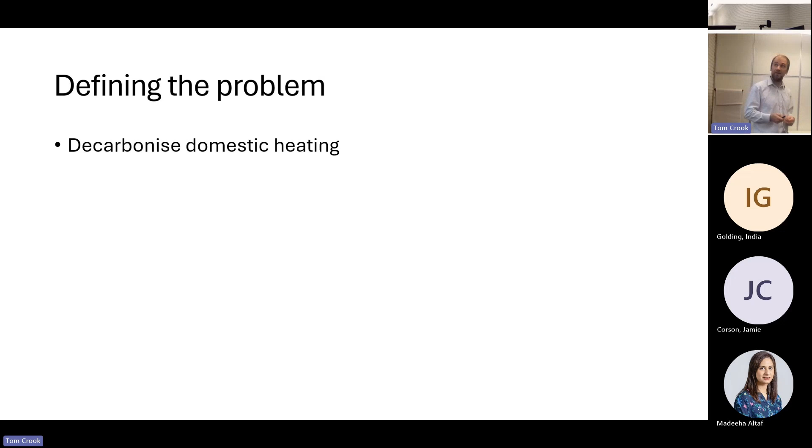So defining the problem. So we want to decarbonise domestic heating. We want to reduce heat demand. That's a big thing to do as well. But as well as that, we want to move away from gas boilers and burning oil. So that's the context. And there's a few different ways being thrown around about how we can do this. We could keep burning something, but that something would be something else, hydrogen or biogas, like that.

We could have heat pumps that use electricity to bring heat from outside the building to the building. We have other types of electric heating, maybe we would have storage heaters or some other sort of direct electric heating. Or we have district heating, which would be a way to use a range of different sources to bring heat to the building through networks of pipes under the ground.

And at the time that I was working, there were lots of different people throwing out suggestions of how we should go about this, with all relatively respected organisations throwing out completely different suggestions of what future heating could be like. So there'd be mainly heat pumps, there'd be mainly district heating, or it could be neither of those, all sorts of ideas floating around.

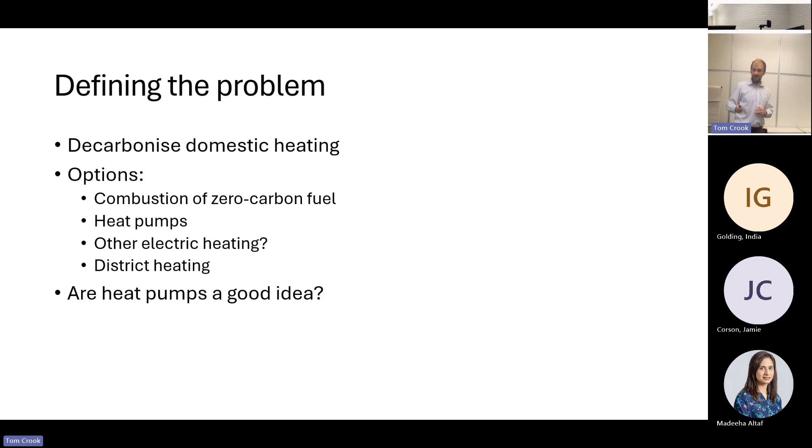So maybe the question that I should be looking at is, are heat pumps a good idea? Because people were saying they're not a good idea at the time, saying it would create tremendous peaks in electricity demand. We just can't deal with that. So they're a bad idea. So that could be one question to think about. Or another question would be, okay, we've already decided that heat pumps are a good idea. So what are we going to do about them? We know that we're going to use more electricity. So how are we going to prepare the electricity system?

So if it's the first question, then maybe we need to make a comparison with the other options that are available, try and figure out, kind of assess all of them and the pros and cons of all of them, and then say something about heat pumps.

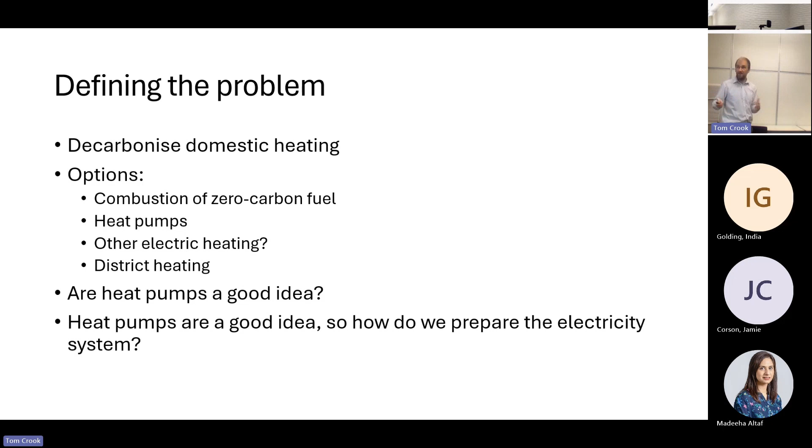In the latter case, we already decided that heat pumps are the way forward, so we don't need to analyse these other options. But in this case, we're talking about planning ahead, sort of 5, 10, 20 years ahead. So we need to not just look at the scenario of what's going to happen, let's say in 2050, but we also need to think about lots of intermediate points, how this is going to evolve over time, so we can gradually adapt the electricity system to cope. So that's going to affect what we're going to do in the project.

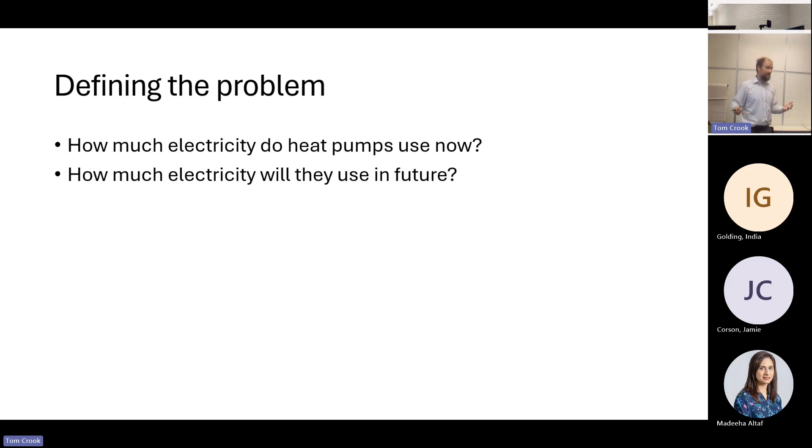And you think about how much electricity the heat pumps are using at the moment. So current installed heat pumps, we could have a look at them. But then maybe it'll be different in the future. So should we be thinking about things as they are now, or should we be thinking about things as they are in the future? They might be different in a range of ways. So if we're going to go for heat pumps, there'll be a lot more heat pumps, but maybe they'll start working a bit better. Maybe the installers will start to do a better job. Maybe the manufacturers will improve their designs of heat pumps.

Maybe the way people use it changes. Maybe to begin with people use it just as they had their boiler before, and they just carry on with what they did before. But as they get more familiar, they start doing different things. We're expecting changes in the climate, and we hope that there are going to be some changes in the building fabric as well. And actually, the starting point of the whole project was really this question here: do people use heat pumps differently to other heating systems?

And this came from Maria Len, who was on the advisory board, and she worked for EDF, and they have a lot of electric heating in France, much more than here. And she was very surprised by seeing the large peaks in demand that we see with gas heating in the morning and evening, because they don't seem to see that in their analysis of French electricity data. So is it something to do with France, or to do with electric heating that seems to give us different patterns of use, or is it something to do with the way that they're analysing the data?

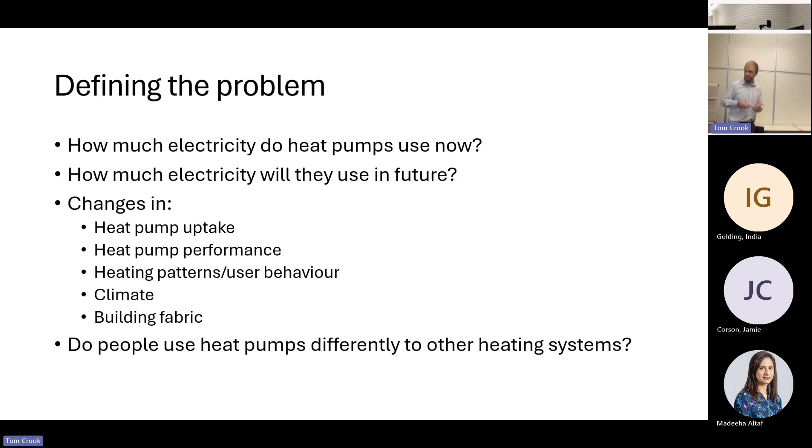So we've got all these different sort of questions floating around, and we need to sort of pin that down a bit more before we can then figure out how we're going to address this. The other thing, and Meg's probably going to be quite bored in the next minute or two, because I'm always going on about this.

But what is the scale we're interested in? Individual buildings, or maybe the local area? Because in that case, we're thinking about maybe the local electricity system and the distribution network, which needs changes made to it, new transformers, new cables into the street. Are we thinking about this from a national point of view? So can we generate some electricity nationally, or maybe regionally? So it might interface with the electricity system at different points.

And we went as far as national there, but is this applicable beyond the UK, or are we only focusing on what happens in the UK? You know, when we publish papers, it would be nice to have something international to say rather than just being nationally focused. And what timescale are we interested in? Are we talking about minute-by-minute electricity demand, are we talking about annual, or something in between?

And those two questions are kind of related to each other, partly because if you were looking at national electricity demand at a minute-by-minute scale from all different buildings all at once, that's going to be an unmanageable amount of data, but also because what actually matters would be different at different spatial scales. If you're talking about an individual building, you might actually need to know about it minute by minute because you've got these very short spikes in demand from things happening in the building, whereas if you're looking at a national level, that's no longer what you need.

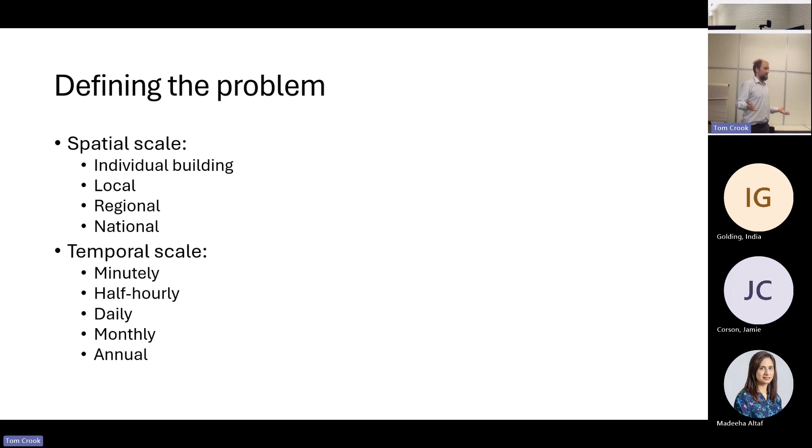And I guess monthly and annual questions, this is always a bit of a change of mindset, that historically, when we're thinking about energy demands, we're thinking about annual, because if you're burning gas, for example, then you just need to know, oh, we're burning 10,000 kilowatt hours a year of gas. Okay, that's fine, it doesn't matter when it happens in the year, we just need that much gas. We're done. But if you're talking about electricity, renewable electricity, then the timing suddenly becomes extremely important. So maybe annual isn't particularly useful.

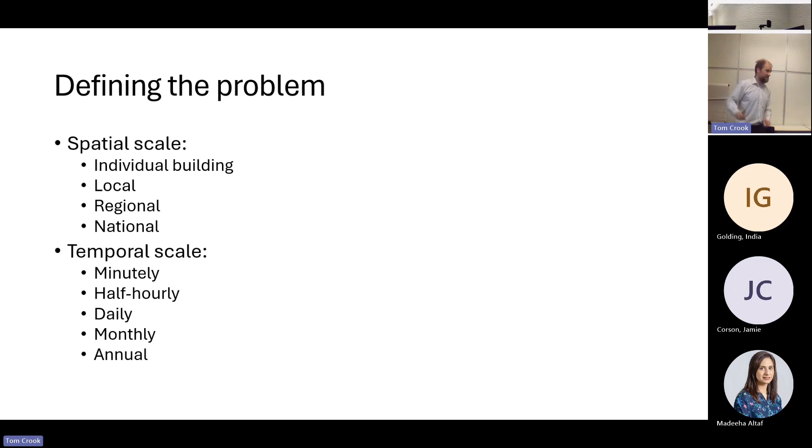So thinking about all those sort of ways of defining the problem, I decided to look at national electricity demand. I think that looking at a local level is also really worthwhile. I chose to focus on national partly because the cost of generation of electricity is probably the biggest cost, rather than upgrading the network. So generation matters at the national level.

I chose half hourly. That's partly driven by the data that I had available to me, also because the electricity market works on a half hourly level. And I wanted to look at, okay, what's happening now, but how we expect that to change in the future, how we take that into account. This isn't word for word what I had in the thesis, so I need to check exactly what it said there. So how are we going to approach this?

So one method would be thermal simulation. And that would give us this high temporal resolution, half hourly, that I said is important. So we could do that. We would need to know quite a bit about the building fabric of buildings. And we could definitely do that for individual buildings. If we're looking at the national level, we'd have some archetypes to represent different categories of buildings, so that might be fine. We would need to know what people are doing at different times in different homes. We'd need that information.

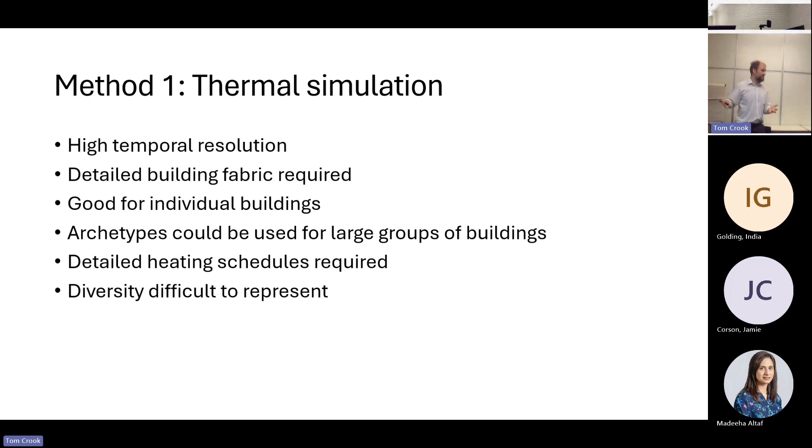But the key point here is that diversity would be hard to represent. This is something that Robert Sansom pointed out in his thesis, and when I read that, I thought, oh yeah, that's exactly right. He was addressing a somewhat similar question, and he started off actually doing some thermal simulation, but then realised once he'd done some, this is the challenge.

So diversity is the fact that not everyone does things at the same time. This is a good thing because it means that, for example, electricity networks don't need to be sized big enough for everyone to do the same thing at the same time. Similarly, water pipes or all sorts of things, road networks. So peaks of demand don't perfectly coincide.

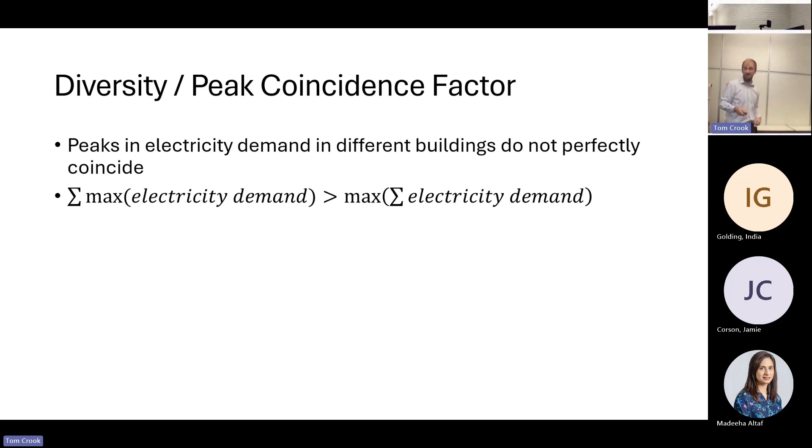So if you get the maximum of everyone's electricity demand and then you add it all up, say that your max demand is 10 kilowatts and mine is 8 kilowatts, and you add that together, we get 18 kilowatts. In reality, if you combine the electricity demand from George and from me, the max is not going to be 18 kilowatts, so we're not going to have that happening at the same time. And the ratio of those two is the peak coincidence factor.

So that's a number less than 1 because we don't have our peaks in demand at the same time. We do things at different times at different houses. So peak's going to be less. How much less? What is this peak coincidence factor? It depends on lots of things. We can get values of this for existing electricity demand with things like kettles and cookers and so on. But the numbers that we have for that don't necessarily apply.

So if you've got kettles, that's pretty powerful. That's used for a very short time. So the peak coincidence factor is pretty low because the chances of you putting on your kettle at exactly the same moment as me are not that great. If you're talking something like heating that is used for quite a few hours, the peak coincidence factor is going to be a bit higher. How much higher?

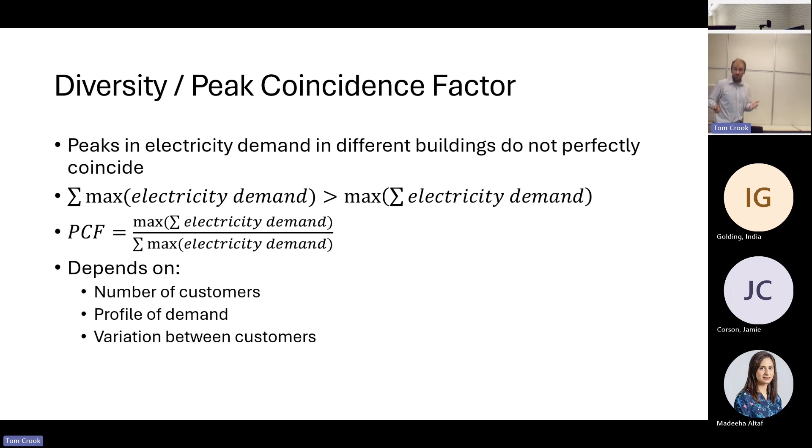So this is the problem: if we're interested in national electricity demand or even electricity demand from a group of buildings, it's pretty tricky unless you can see something like this peak diversity or peak coincidence factor. And it depends on these things we don't really know, or didn't know at that point in time. To do that, we would need accurate knowledge of these schedules in various different homes, which I didn't have at the time. But maybe you could do this, and I think that would be an interesting thing to do.

Maybe somebody can try. Maybe you can get a data set of lots of monitored temperature data from lots of homes and figure out what's the range of heating patterns, and on the basis of that, what is the peak coincidence factor, and how does it then affect the demand for heating and electricity if they're all from heat pumps. Maybe somebody here could do that.

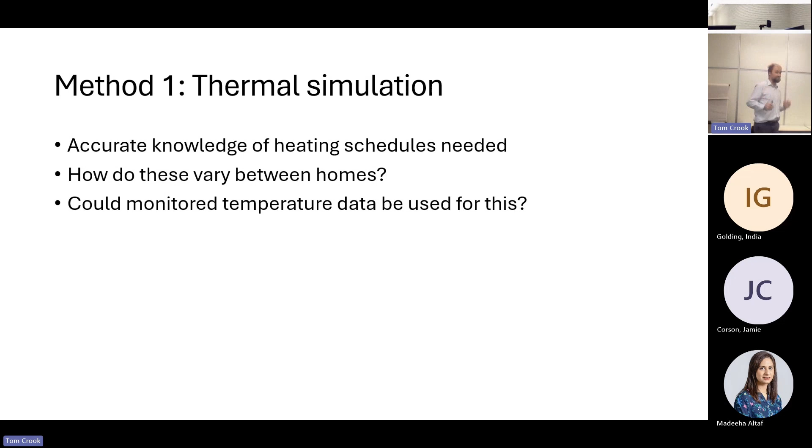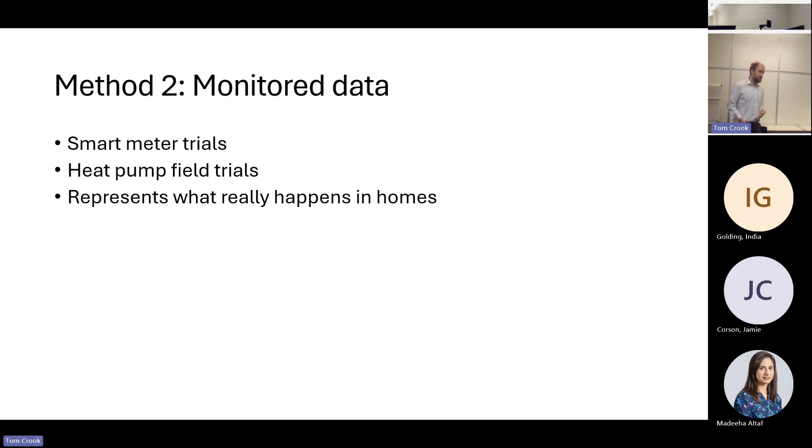So I didn't do that, and I started thinking more about monitored data, specifically from this trial of smart meters. Now there's things like SERL, where you get access to smart meter data that didn't exist at the time, and also heat pump field trial data. And that shows us what's really happening in homes, which is good. So we're not just assuming that people do things at particular times. And it allows us to represent diversity in real homes.

How does that fit together when you add them together? It's good for what happens right now, but it's kind of tricky for what happens in the future, because we don't have the flexibility to change lots of things and see: if we're going to add insulation to these walls here, how is that going to change the demand? You could answer that question with thermal simulation, but it's going to be a bit more difficult here.

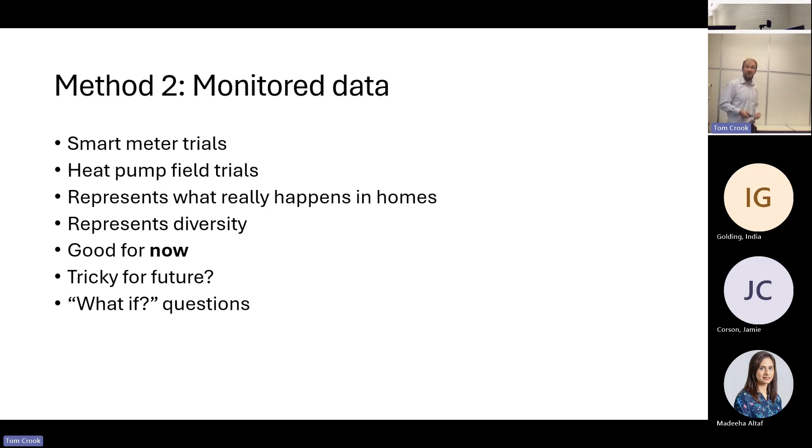But the main problem was that we had a lot of data from homes with gas boilers that were, as far as we can tell, representative of the housing stock. But we sort of thought, well, maybe people use boilers differently to heat pumps. And then we've got a lot of data from homes with heat pumps, but we know for sure that these homes are not representative of the housing stock.

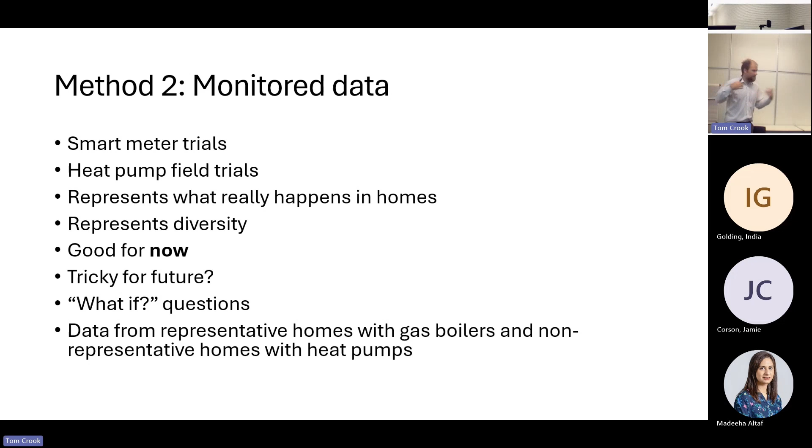These heat pump homes are either large rural homes with relatively well-off occupants, or they're social housing. About 1/3 private, large rural homes, 2/3 social housing. So that's not really representative of the housing stock. And this was the main puzzle: how do we piece this together? How do we come up with some method that represents how people actually use heat pumps, but also takes account of the fact that this isn't the right housing stock?

There was lots of data cleaning to do. We've got a relatively large data set. I hadn't done something like this before. There were 4 different electricity suppliers involved in the smart meter trial, and I have the feeling that there was some condition that they had to make the data available afterwards, but nobody put any effort into making it usable because they were just forced to do it.

That's the feeling that I get, because it was all just dumped into one file of 4 different suppliers in a random order. There were a few data points from one year, and a few data points over here from some other year. Who knows what's going on? A lot of work for me to try and make sense of that and identify the problems and sort them out. As far as I'm aware, nobody else has done that.

Other people that have looked at EDRP data have just taken the electricity data from one supplier, or a separate data set from just one electricity supplier, and maybe they were able to deal with that. As far as I'm aware, other people have got this data and thought, oh, I can't be bothered with that. I'm not doing it. Maybe they're sensible people.

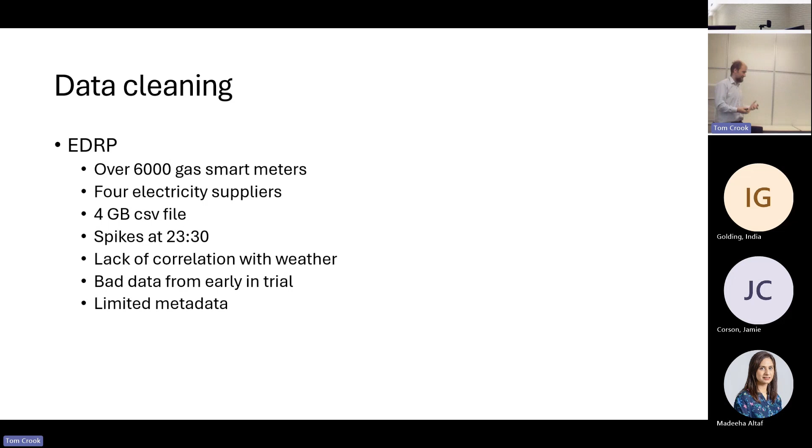So there's lots and lots of work going round and round. You think you solved it, and then you find something else going on. Is it real? Is it not? Am I biasing the data set if I take this out? What does this actually mean? The heat pump data is a bit smaller, but measured at higher resolution. We've got a bit more information about the buildings.

But there were also problems with that data set. UCL in particular had a hard time with that, because they were responsible for writing the report on that data, and they showed up for the data after it had all been collected and were told, tell us what it all means. But they had no involvement in collecting the data. So there were problems, but they couldn't go to the homes to identify what the problems were.

If you ever mention this to anyone in the industry, they'll have a great big rant about how it was a load of rubbish and people at UCL don't know what they're doing, and they didn't know the first thing about anything. Yeah, if there's an awkward silence or something, you can just say that, and then they'll just keep talking at you for ages.

Yeah, so I could try and identify problems in the data. You hope that once you've done all that, you've identified the problems and removed the homes with those issues. Maybe you can't know for sure that you achieved that, but that's what you're trying to do. Things like the temperature sensors being strapped onto the outside of the pipe rather than inserted, so they're actually in the flow of the water. The heat meters being calibrated for pure water, when it's actually a mixture of antifreeze and water.

Something going a bit weird with the heat meters, the flow was gradually declining over time, suggesting something not quite right there. Measuring heat in general is a bit more tricky than measuring electricity. You've got to measure flow rate and two temperatures correctly. And if any of those three things are wrong, your reading's wrong. Whereas electricity is easier to measure.

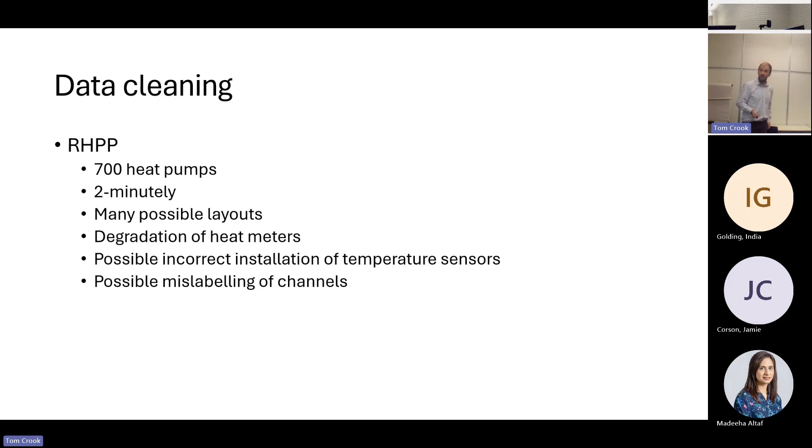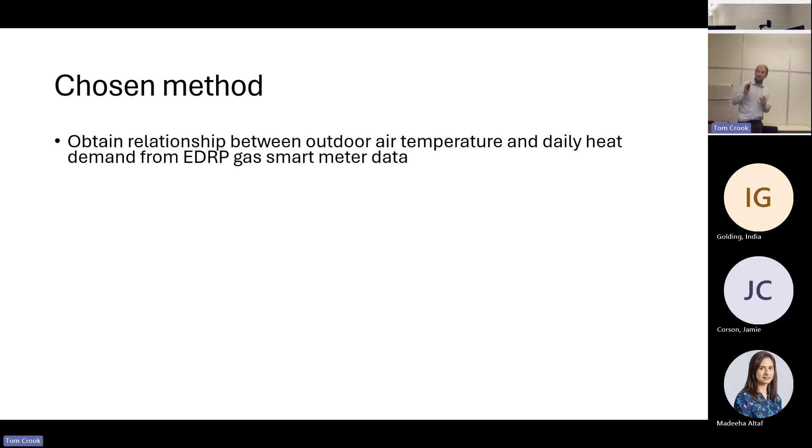So I was going with monitored data rather than thermal simulation, for the reason I described. I started out by looking at the relationship of outdoor temperature and daily heat demand from smart meter data. And then I looked at the patterns of heating in the gas data and in the heat pump data to understand how we're using gas boilers and heat pumps. Is that different? It kind of was one of our starting questions.

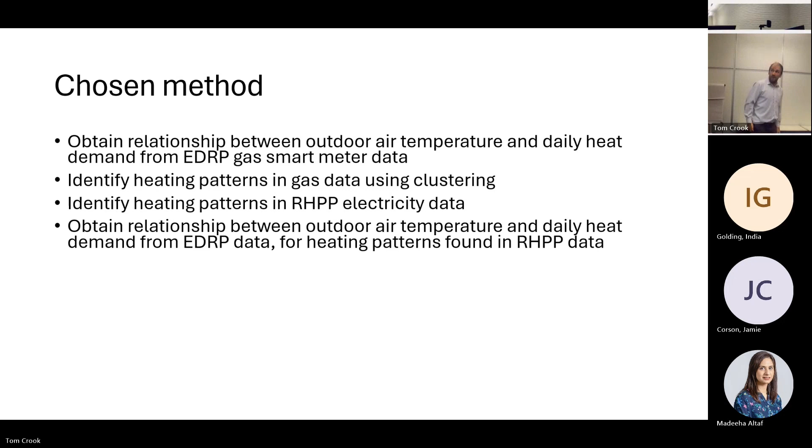And then look at how does that affect this relationship between daily outdoor temperature and daily heat demand. Is it different for people that use heating all day versus people that use it morning and evening? So there's a stage I sort of slightly skipped over after that, which is then to look at how we use the heat pumps and how does that then convert from daily into half-hourly demand. I'll explain that later.

And then, so that gives us heat demand. I want to talk about electricity demand, so we can see how well the heat pump is performing. So again, using the RHPP data. So this was the daily heat data, daily electricity data. I tried to steer away from using the heat data as much as I could, because we knew that was where the biggest issue was, but inevitably you have to use it somewhere to get this relationship between heat output and electricity input.

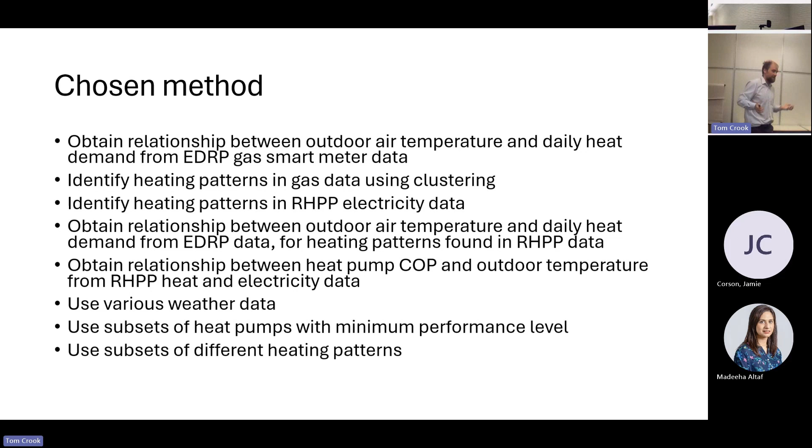Look at different weather data, to look at what might happen in the future. And then hopefully heat pumps will start performing better. So we could look at just a subgroup of the best performing heat pumps from the sample, see how that looks. And indeed, there has been another study of heat pumps since then, and there has been some improvement. And then look at different subgroups with a particular heating pattern to see, if heating patterns do change in the future, how much of a difference is that actually going to make. So it's 4 results chapters.

How are we doing for time? 5 minutes. Right, good. I'll talk about these more quickly and then I'll say a bit more at the end.

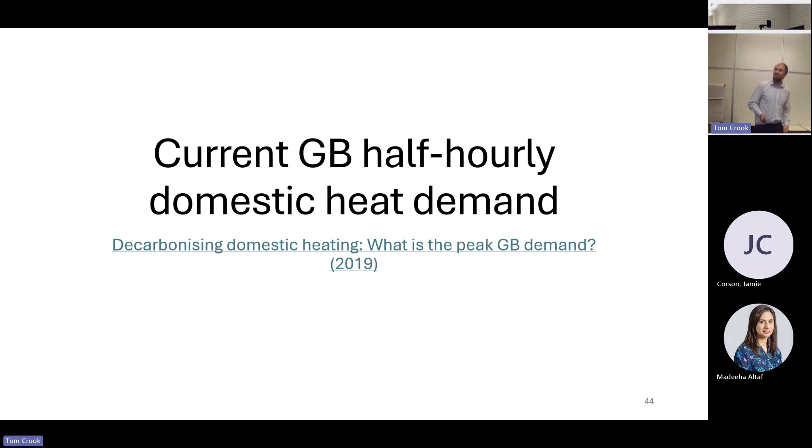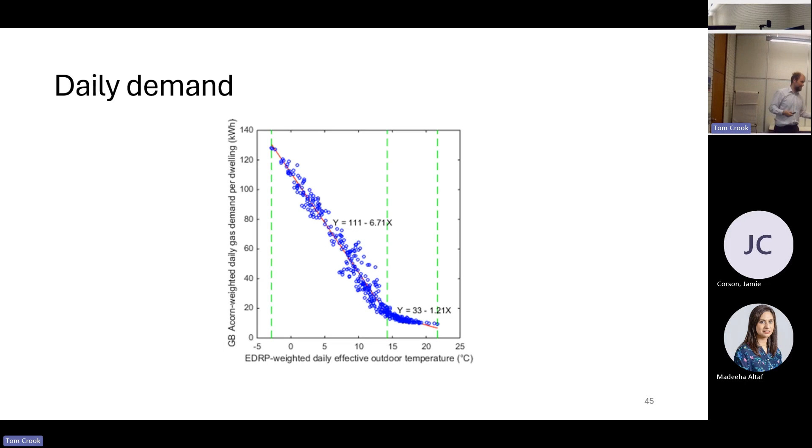So this is the first bit. Look at the current situation. That's what I was talking about, daily heat demand. We've got this broken stick shape. That's what you'd expect because this bit down here is when most people have stopped using their space heating. So it's not as much related to temperature, whereas that bit on the left is when people are using space heating and that's strongly related to outdoor temperature. This is one of the key points, which is that the way that's spread out over the day is different at different outdoor air temperatures.

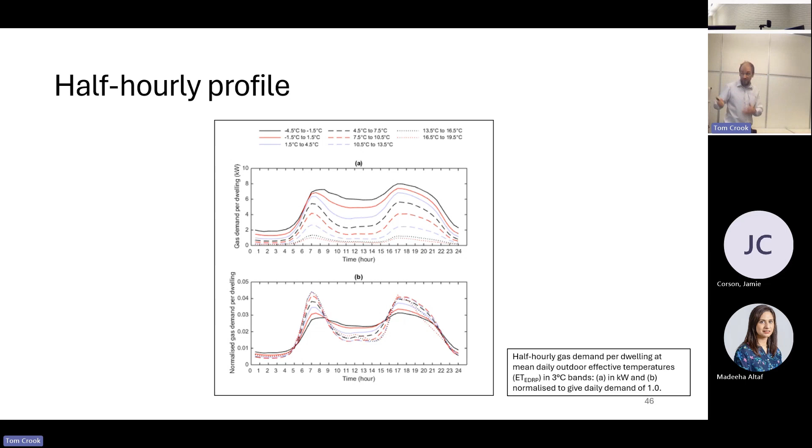So you've got the same area underneath. At the warmer temperatures, you've got quite a big spike in the morning and the evening, and a sort of flat bit in the middle of the day. At the colder temperatures, it's actually more flat in the middle of the day. So that suggests that perhaps when it gets colder, there's more people using their heating through the middle of the day. Whether that's that maybe they've got a set point that it doesn't normally fall down to through the middle of the day, or they're manually fiddling around with a thermostat, who knows? But that's what's happening, and that does fit in with what people have said anecdotally in the past.

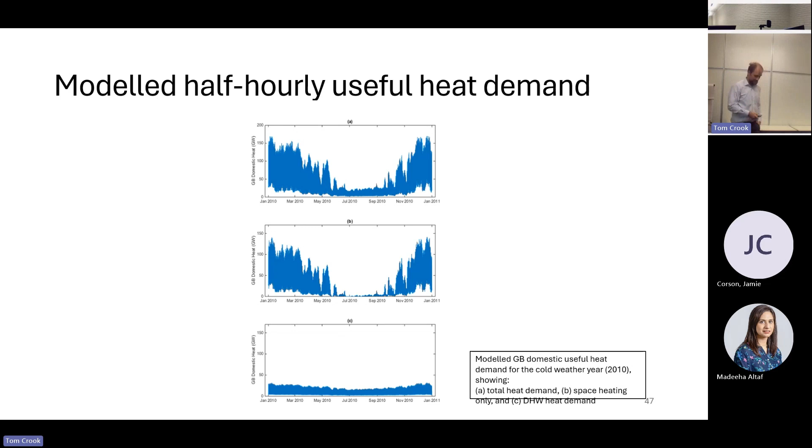So you can use that to then get this half-hourly heat demand. You can split that into space and hot water. Comparing to Robert Sansom's, this is quite interesting. He looked at this before, it's a similar method on a much smaller data set, including only relatively mild weather and not accounting for the way this shape changes. And so a graph based on his work was floating around at the time, and what he found was these tremendous spikes in heat demand and very steep gradients. So the gradient you see goes shooting up very steeply.

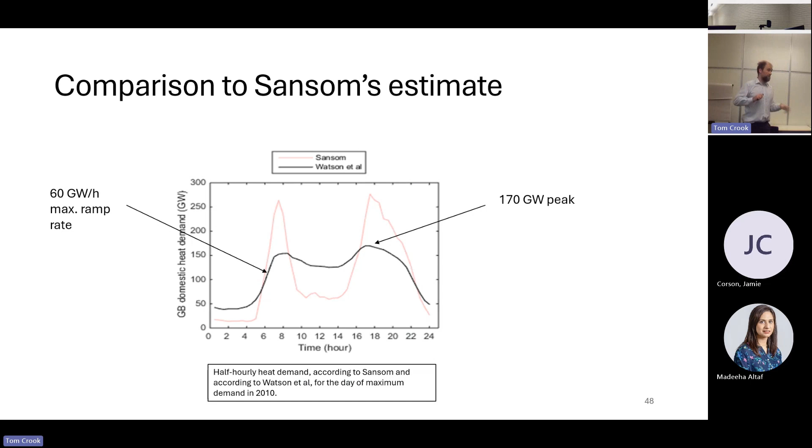People were using that to say heat pumps are silly, because how can we possibly design an electricity system that can cope with these tremendous swings in demand and huge peaks? But I found that actually it was much less severe than that. Okay, there are big peaks of demand. This is a big challenge for sure, but it's not as bad as that. And that seems to be of interest to quite a lot of people. There's been another paper more recently by some other people using a completely different method, and their findings were fairly close to mine, so that was quite nice to see.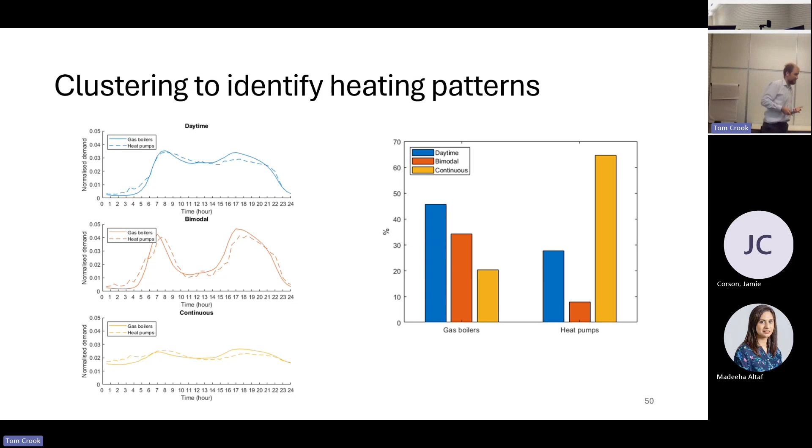Is that going to change over time? Maybe we get more heat pumps and we'll have to run them through the night. Or I'd actually like to be a bit cooler at night, I don't know. Because we've done that, we had the opportunity to look if there's any other factors affecting that. We can then look at the effect of that on the daily heat demand. It's like what I showed you earlier, but just for the subgroups of different particular heating patterns.

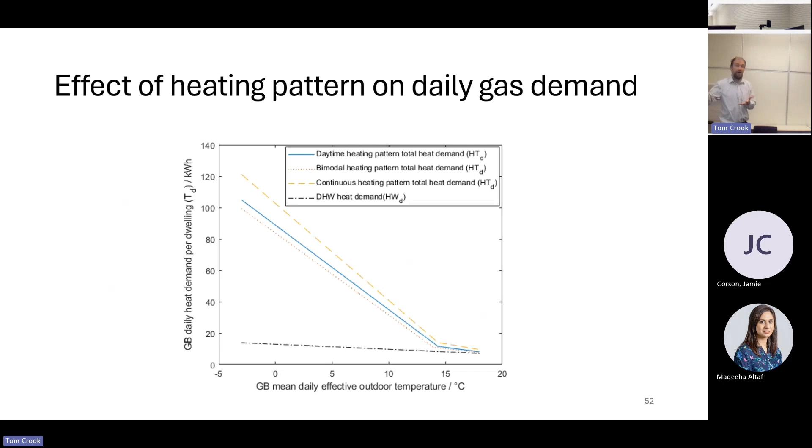So you can see then that if people switch from one set of heating patterns for boilers to another set of heating patterns for heat pumps, you can see how that's going to change their daily heat demand. Over the course of the year, that's going to give about 8% more heat demand when you switch from a boiler, because you're starting to heat more hours per day, which fits in with previous estimates. The same thing for heat pumps, but now it's a slightly different shape because there's a lot more people using it through the night than they were with boilers.

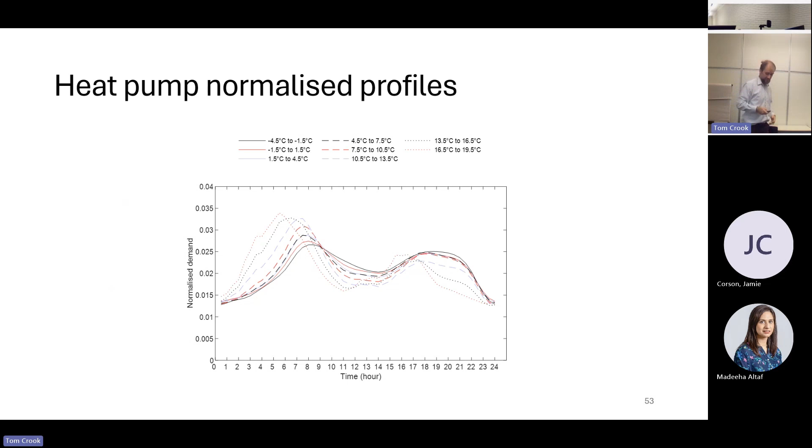And so you can do that same kind of method as I did before with the heat pumps. And you can see the peak demand with the same weather data. That peak demand's a bit lower. With heat pumps, because people use them through the night, there are not such big spikes in the morning and the evening. 157 and 170. But the ramp rate is much less, the gradient is much less, so there's not that sudden everyone turning the heating on in the morning and it's shooting up. So that's been interesting as well. So it's not such a severe challenge for the electricity system to cope with.

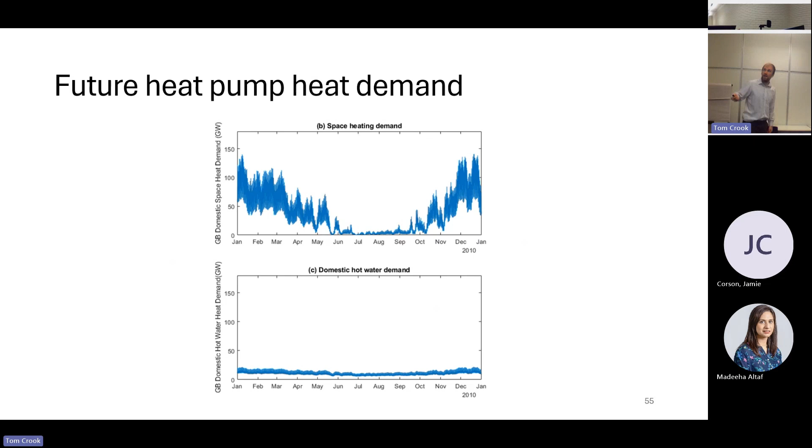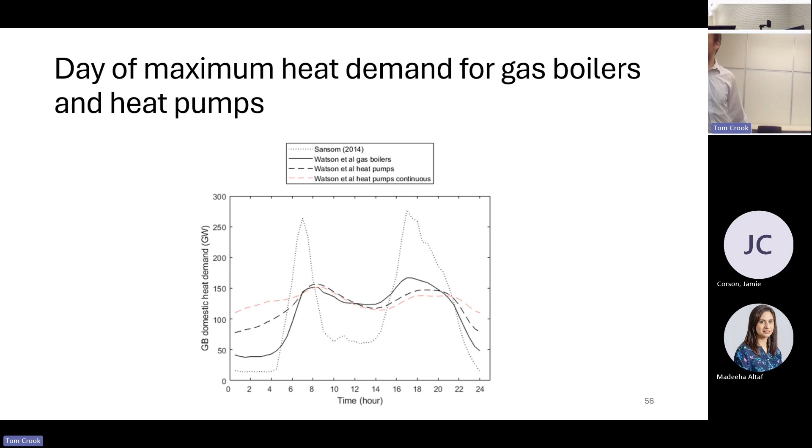And then we look at that for space heating and hot water, looking at the coldest day of the year. So the solid line is the one I showed you before for boilers. And then the dashed black line is for the heat pumps. So you can see that heat pumps are being used differently to boilers. There's a lot more people using it through the night, so there's a lot more demand in the night. But all of them are much less than what was previously suggested.

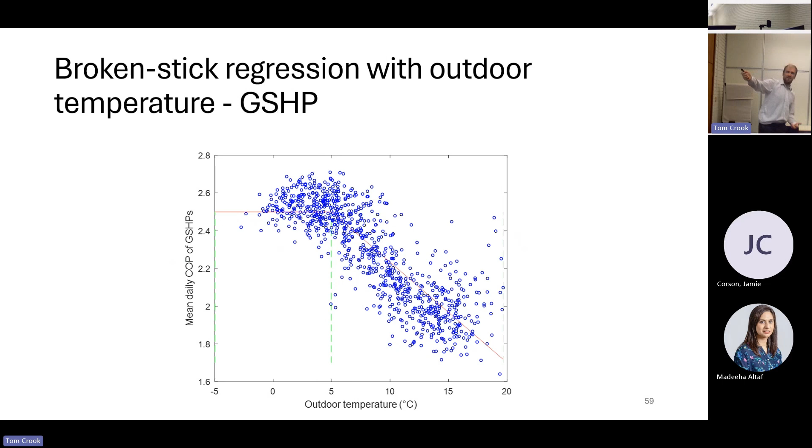There's a lot more scatter for ground source heat pumps. They're not that directly affected by the temperature. Maybe you could say that this is the wrong approach. Just look at that, it looks a bit questionable. And then we take subgroups of the best performing heat pumps for ground source and air source.

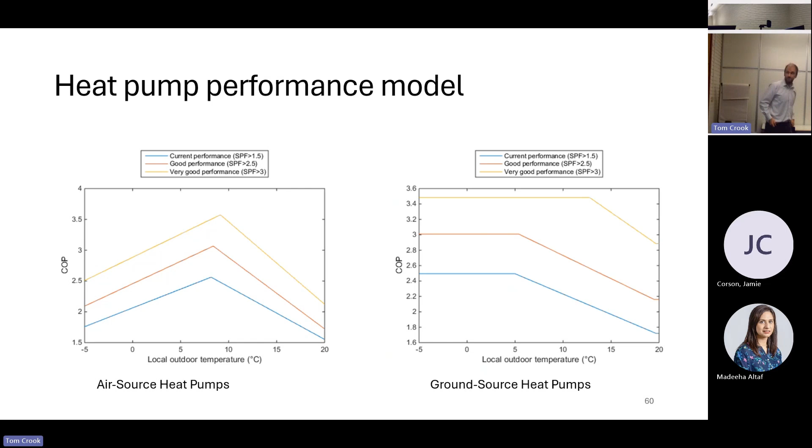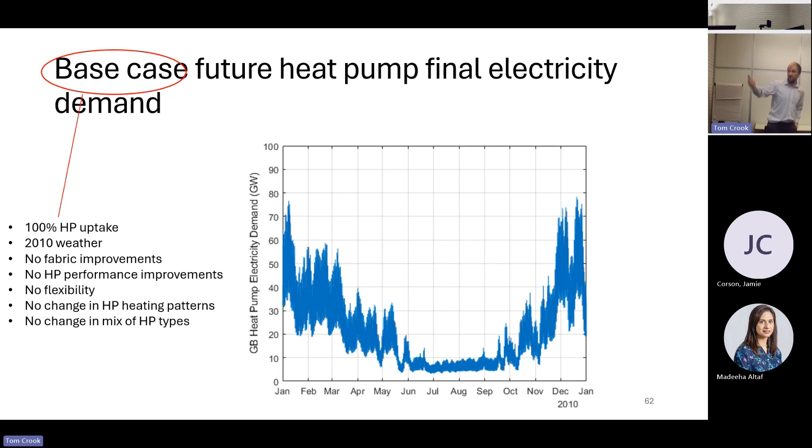So you can put it all together. I call this base case. It's kind of like the worst case, really, assuming that there's no improvement in anything, everything just stays as it is now, and it's a really, really cold year. This is what we get. We get 76 gigawatts of electricity demand if everyone has a heat pump and nothing else has improved whatsoever since the current situation. Current peak electricity demand is about 60 gigawatts, so you're still talking about more than doubling the electricity demand. So that's what it looks like if you add on to existing electricity demand.

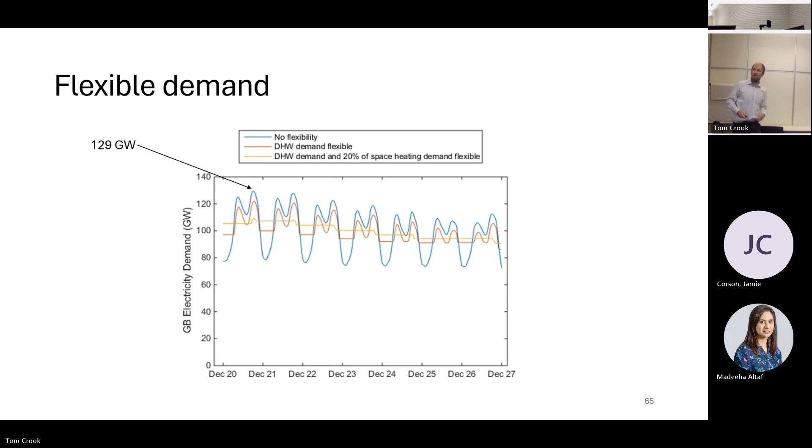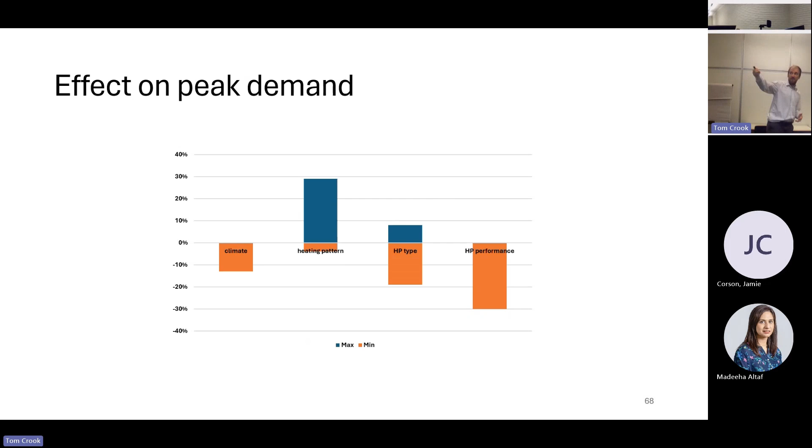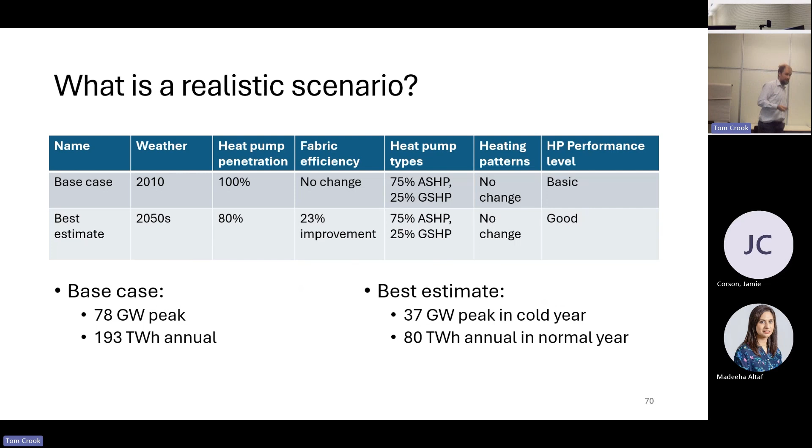But we look at the flexibility, I won't say too much about that. But then we look at what all these different things change: climate change, energy efficiency of buildings, and heat pump performance. What does that look like? You can see there some effects they might have, and then we went for what we thought was the best estimate of some reasonable assumptions. Other people would disagree. They can go to previous graphs to see what they think it would be. To see, okay, what might it be like? And those are the results we found. So okay, it's still a big new electricity demand, but it's not something completely unrealistic.

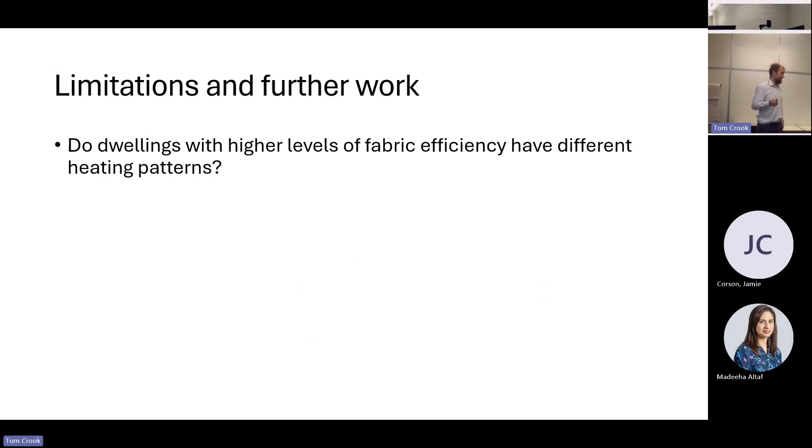So this is what I want to say a bit more about, so trying to get through the results quite quickly. So we don't really know if, usually, when the building changes there's a change in heating patterns. Do they think, oh, this is great, I'll only need to put heating on for 2 hours a day? Or do they think, well, there's no point in turning heating off because it is really efficient anyway, so we've got to keep it on 24 hours a day? I don't know. Has the data cleaning worked? We hope that we've identified problematic data without biasing the data set by removing good data.

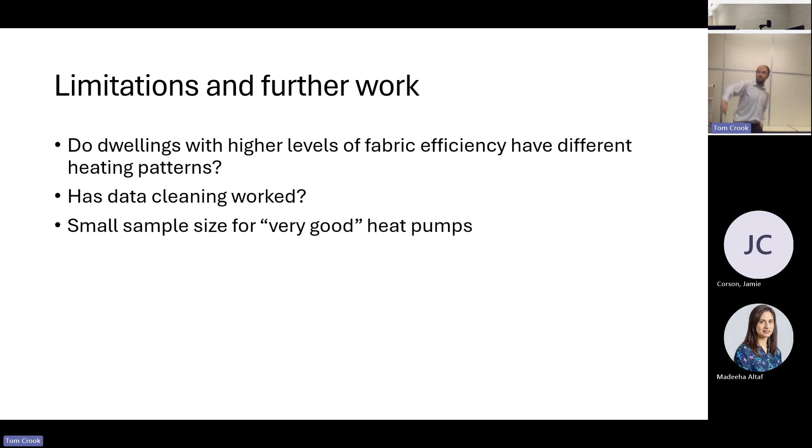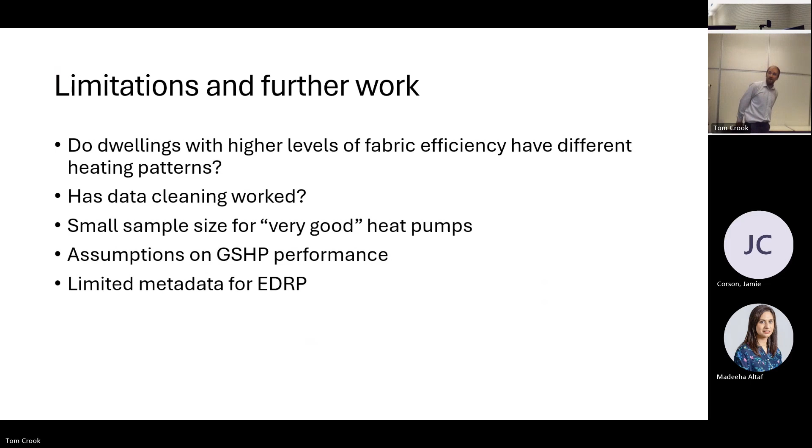Look at the very good heat pumps, particularly the ground source, that's quite a small sample size. Is that realistic or not? You saw there's a lot more scatter in the ground source heat pump performance anyway. Is that the right approach to it? The metadata for the gas data was quite limited.

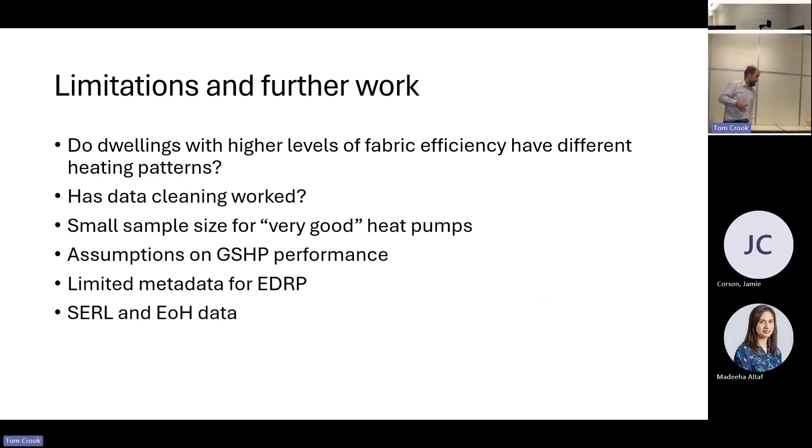There's 2 new data sets which you can use now if you're doing the same project now. You've got smart meter data. Okay, it is within the secure lab thing, which is a bit tricky, but you can do something with that. And the electrification of heat is kind of like a follow-on study of performance. Now, the data is better quality, you might get some interesting findings. And maybe somebody could choose to do seasonal variation, maybe there would be some value in doing that, taking into account the variation to get real homes.

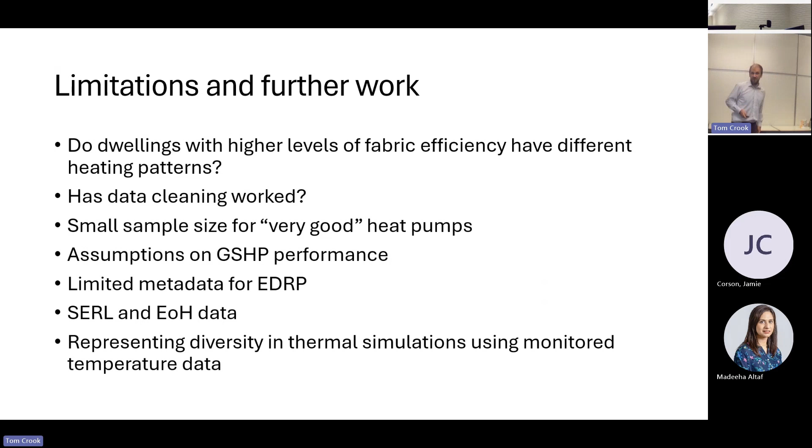The last thing I want to say is that what I presented to you today seemed quite, well, I hope it seemed quite logical. We sat down and we thought, okay, what's the problem here? This is the problem. Here are the ways we're going to tackle it. Right, we're going to pick this one, because this one's the best. But actually, what really happens is much more like this ball of noodles, because everything is connected to everything else. It's all sort of tangled together, and you tried one thing, and you got so far with that, and then you realised it's actually a bad idea, and then you did something else, and then you thought you solved it, and then you realised there's actually problems with data cleaning, and there were some other issues with data. So you have to go back and start again, and then you have to try and write it down for other people to understand.

And what you need to do is don't write that down, because nobody will understand. You need to write it down as if you knew what you were doing from the start. Write it down in really clear and logical steps. And I find it difficult because things tend to be connected. You think, is this part of the method, or is this actually a result? And is this data cleaning, or what is this? That's what really happens, but you have to write it down in a very logical step-by-step way as if you really knew what you were doing. That was the end.

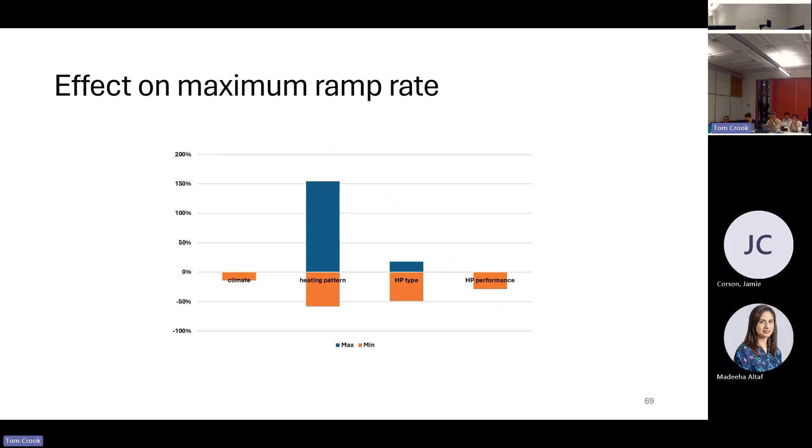It is, I guess, a question of should we be looking at how heat pumps actually perform in real homes right now, or how well could heat pumps perform if they were set up well and running properly. And I think that's what the heat pump industry gets angry about, because they know that heat pumps can perform much better than that. If you're trying to find out how well heat pumps can perform in this home, that's one question. But if you want to say what's actually happening out there in the wild, that's what's happening now. With the new data, there have been improvements in performance, which you can see.

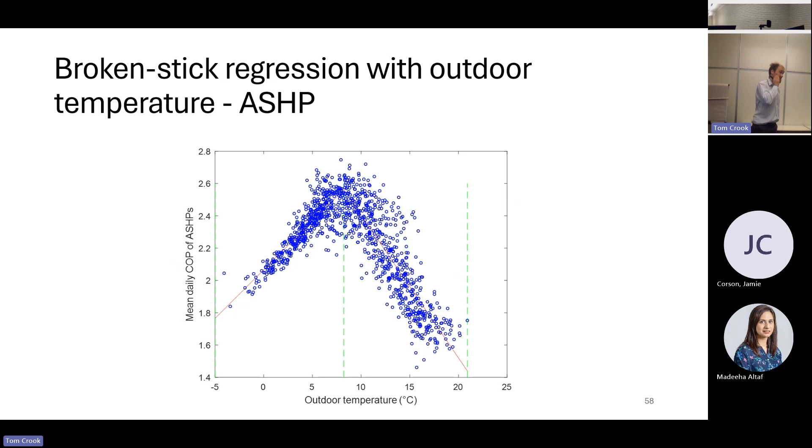And this itself was an improvement on the previous heat pump field trial, which was 2008 to 2010. It's smaller, but was an improvement in this trial. So it did move in the right direction. But the main problem was them not being installed very well. I think the manufacturers themselves have also improved their control algorithms, so that they're not cycling on and off necessarily.